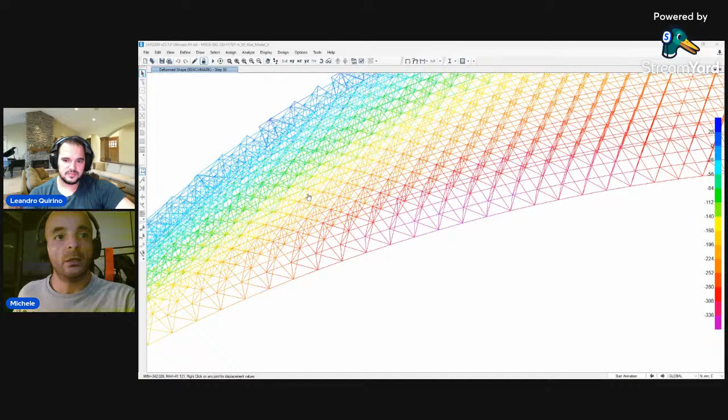No, Leandro? I can only see the trusses. Can you see this one? The two red lines. Can you see the two red lines? No, the only red lines that I can see are the trusses. Which trusses are you talking about? Yeah, those ones you are showing now, if you go to the right, up, yeah, those trusses. Which trusses? Well, I can see an image of many trusses together, and then on the right, probably the tensions are bigger. If you go to the left, they become green, light blue, and blue.

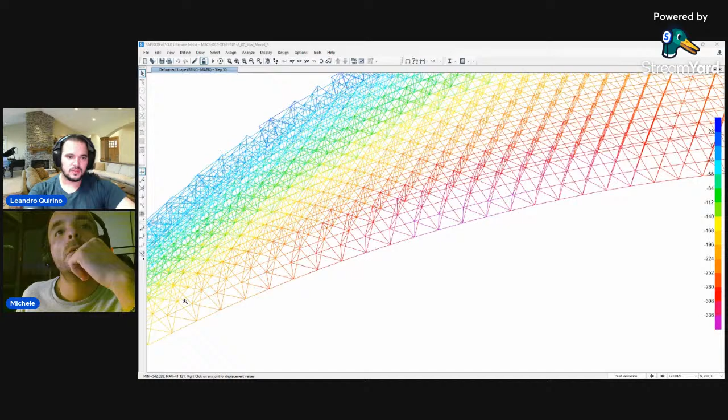Are we looking at the same thing? I don't think so. I'll send you a photo of what I am looking at. No, no, no, not this. It's not this. Hold on. Let me stop sharing this thing. Present again. It was not that one. Share screen. This one here. Can you see that? Oh, yes, I can.

Here we go. So this one is the New Safe Confinement in Chernobyl. This one here is the power plant. This one is the cooling basin that they use for cooling the power plant as well. And what I was mentioning, this is the power plant. So this structure has been built far away from the power plant itself, because what was the problem here? A huge amount of radiation, so nobody can work here for more than 2 or 3 minutes. So what they had to do is build the full structure outside the range of the radiation, and then skid it to slide the structure all the way on top of this structure.

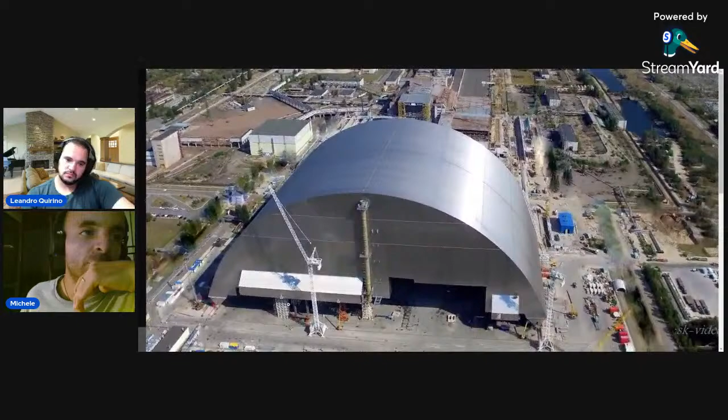So this one was pretty much the New Safe Confinement. When I was on site, one of my tasks, besides all the temporary works engineering that I had to do, I completely redesigned this portion of the structure itself, this cantilever here, and the support for the vent stack. This was the project here.

Regarding the Matagarup Bridge in Perth. Can you see the bridge? I can. This one is the bridge in Perth. Now, on this, I didn't design the bridge itself. I was not involved in the design of the bridge itself. I was involved in the design of the short span on the side, and in all the temporary engineering. So all the methodology in which these two arches have been put together, assembled on site, transported with barges into position, and then lifted up. And this one was in Perth.

Okay, I have a question in regards to the difficulties that you faced when you were doing this project. Difficulties. Well, okay. So imagine that you are pretty much a fresh engineer in a completely new environment, working with a client that has a very strict schedule, something that has to be done quickly. So everything has to be completed in, you know, hours. The pressure is very, very high.

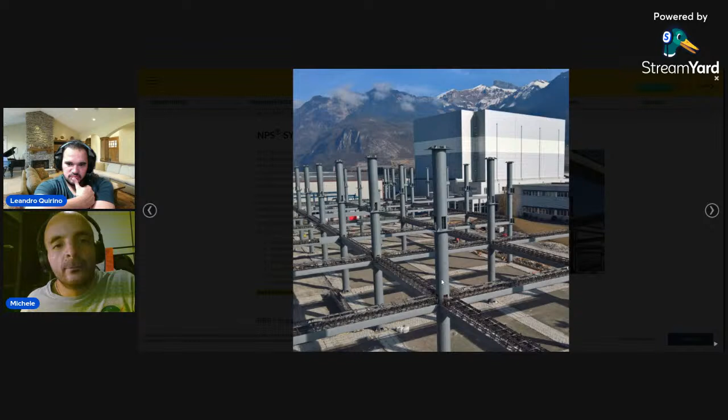This one would be a little bit tricky. Tecnostrutture, because this one was a company that has this system. I'll show you. So what they do here, they have this particular system. They design and they construct this system. This one is a steel tube that will be filled with concrete. So there is a reinforcement inside, a steel tube outside, and on site it will be erected as a normal steel column, and then we will pour with concrete.

And as you can see here, there are also the beams, the same thing. So you have a lower part of the beam that is in steel plate, that is used to be the formwork for the concrete itself. Then you have the reinforcement inside, and here you will pour all the concrete in order to solidarize the steel beams with the columns, and everything will work as a composite structure. How wide are these beams? Because they look really big.

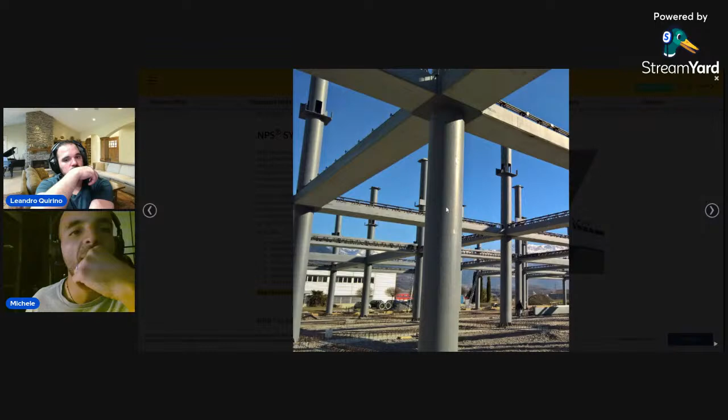This one can be 1.5 meters. Yes, those are huge beams. Some of them are smaller, but some of them are really huge. So this is the system that they developed, and I was on site for them to build. Let me see if I find it. Hotel, New Delhi, Tecnostrutture. Yes, okay.

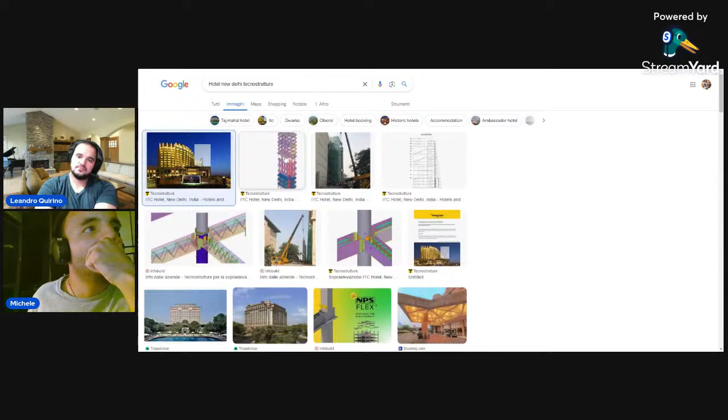Now the hotel is this hotel here. Can you still see the screen? Yeah, I can. So this hotel here. From this side you cannot see, but on the other side behind here, they constructed a full new part of the building, and they had to build this over this wing of the building. So all the things that were above this level had to be supported by this system, and they needed some seismic isolators to avoid a big impact on the foundation.

So what I was involved in was the level in which they created this transfer floor, in which they put some isolators, and I was involved in following the construction for this portion. Yeah, this is the building. Let's see if I can find the portion of the building that they built afterwards. Maybe here. Let's see.

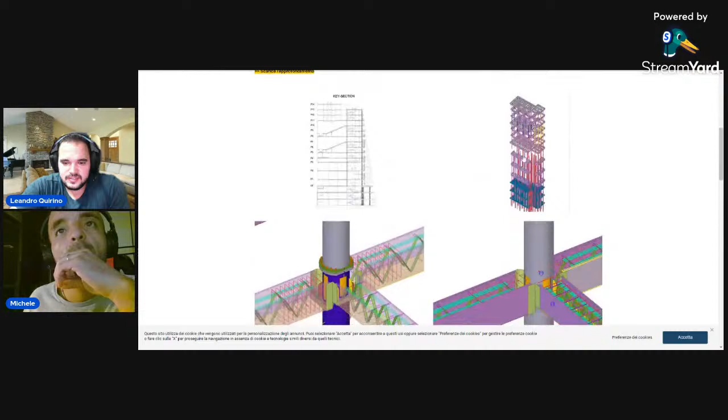Yeah, here we go. This one. Can you see here? Well, I can see one, hold on. Let me see, which is pretty much the one you were showing. Oh, yeah, okay, I can see that. Can you see the model here? I can. The violet model?

Yeah. So this one was the structure that I was talking about. So they built this part, they reinforced this part. Then here they had a big transfer floor, and from there they built all these things up. Okay. So that one was a pretty interesting job as well. You see here. Here we go. This was the construction.

Zero security, zero safety. You were the construction manager? I was the engineer on site. I was not a construction manager. So there they don't have a safety guy. Now here you can see the net around, but they put the net around only to take this picture. The net was put only and only for taking the picture. Really? Yes. Interesting. Yeah, very interesting.

So yeah, this one was the other project in New Delhi. Then after that, I moved to Australia, and there started my adventure in Australia. We are talking about Perth, 2019. Which was Perth, the bridge you showed us? No, that one was 2017. Then I went to United States, New Delhi, and then I came back to Australia, to Sydney. And from there, I never left Sydney.

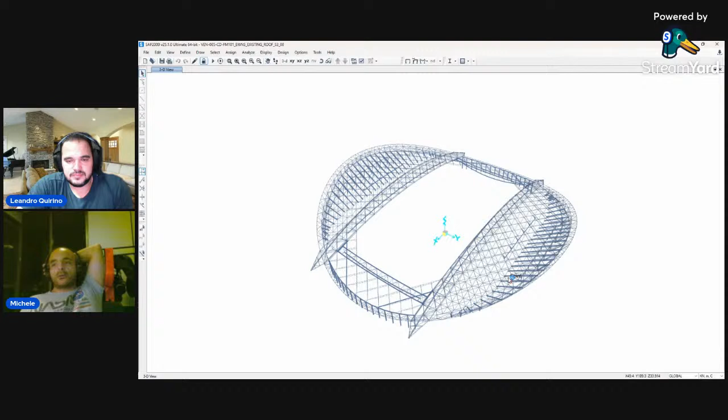So this one is the SAP model of the roof of the stadium that is called right now Accor Stadium, in the Olympic Park. This is the existing roof. So the east and west portion of the roof with a main arch, and the north and south portions of the roof that are two temporary roofs. When I arrived here the first time, I worked on this stadium. I was involved in the roof, but at that time we were developing a fully new project of the stadium itself. And I was the coordinator for the steel part, for all the roof stuff.

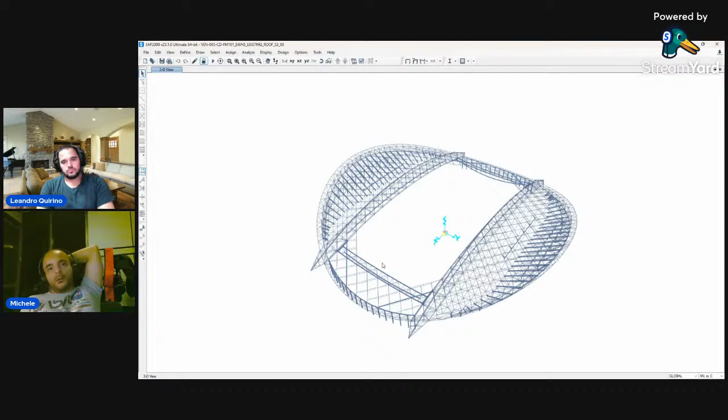At this stage, we are doing this in parallel. We are developing a new proposal for the new roof, but we are proposing also to maintain the existing roof and to strengthen it so that the existing roof can be maintained safely for another 50 years. So this is the type of work that I started with. Of course, in 4 years that I'm here, not all the projects are on this level, because this one is a big project. Not all of them are big projects like this.

But since I started to work here, I worked on four stadia, four stations. So you have been only doing stadiums? No, I've been doing stadia, I've been doing a cable stayed bridge. We designed a cable stayed bridge. We designed a via ferrata. Do you know what via ferrata is? No, I don't.

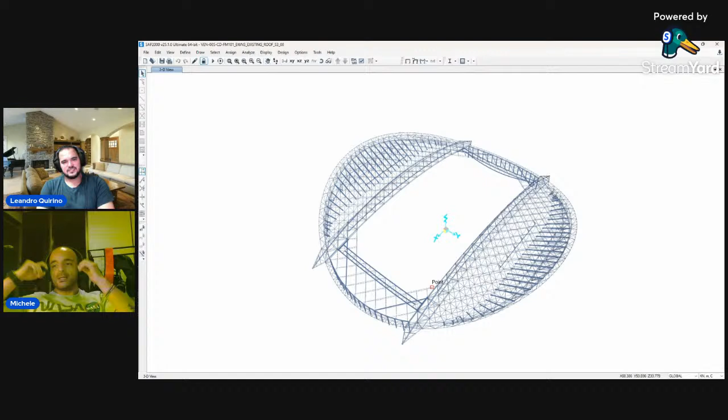Imagine a path on a cliff in which you have to climb, anchored to a rope or to stairs. We designed all the anchors in this structure, and now they are building the thing in Queensland, not so far from Brisbane. So we designed that, and then related small stuff. Sorry, I don't know what that is. What is this? Is it a climbing thing? Yeah, it's a climbing thing. Imagine that you have a series of obstacles like the one here.

Let me share again. Share screen. Imagine that you have a series of obstacles like this, for example, a rope like this, all these things on a cliff. You have these kind of things, no? And we designed a full park of these things in Queensland. Imagine something like that. Via ferrata. The project is being built now, but this is the layout of the project. Let's see. Nice.

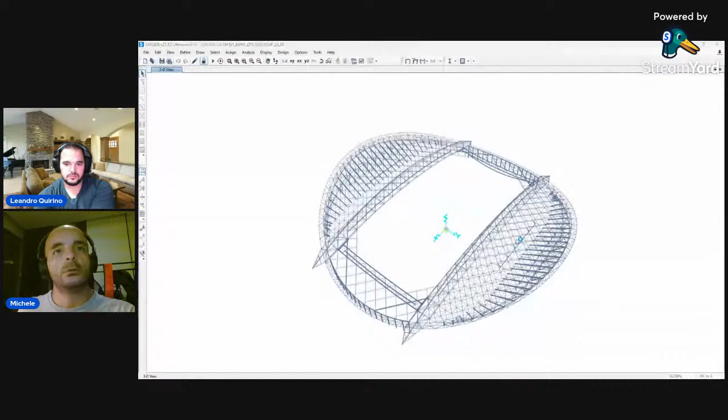So if you want, we can dive straight into a small bridge, a steel truss bridge, and let's go see what's the process. Okay, a bridge made out of trusses. A bridge made out of trusses. So first of all, let me share the screen. Window. Here we go. File. New model. Not save. All right.

Do you want me to go through all the steps, all the choices that I'm making on this, or do you prefer to go more high level on the geometry itself, on the modeling itself, and then focus a little bit more on the design? How do you want to approach this? I will leave it to you as an expert. Just bring whatever you think is valuable for us.

Well, you know what they usually say. If you know how to do something, don't give your client everything, so that he will call you again, right? Right. So the point is, I will give you just a flavor of what it could be, and we will organize another podcast to go more in detail. What do you think? No, that's a good point.

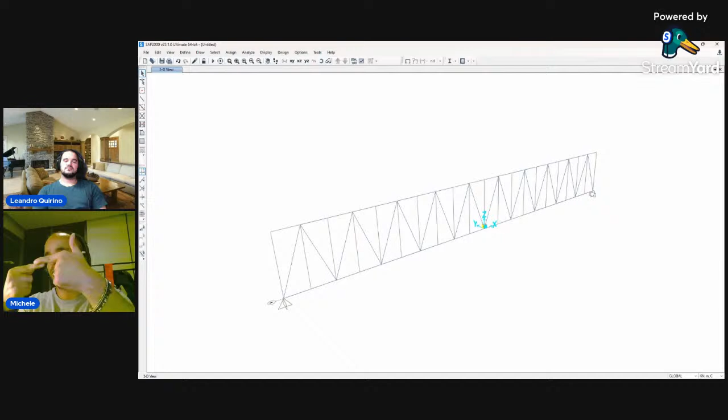We divide the bending moment by the height of the truss, and we see what's the tension force and the compression force that goes in the two chords. If this tension and compression force leads to a steel section that is reasonable, we are good and we can proceed with the detailed design. Or the other option is that this force leads to a section that is too big. So what we are going to do, we just increase a little bit the height of the bridge. Following? Yeah. So for the moment, this one is the first step. We'll see.

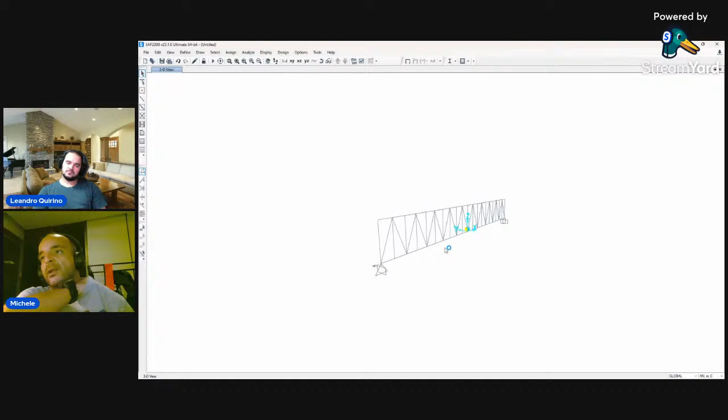Okay, so we take this, we replicate in Y, and we make, I don't know, a 10-meter wide bridge.

And we replicate once. Okay. Then what we are gonna do is, so this one represents the main structural element, the main supporting element of our bridge. Okay, so those are the primary structures. Then we will connect all the transversal members, the secondary, and we replicate these as well from here to here. We say 3 meters roughly.

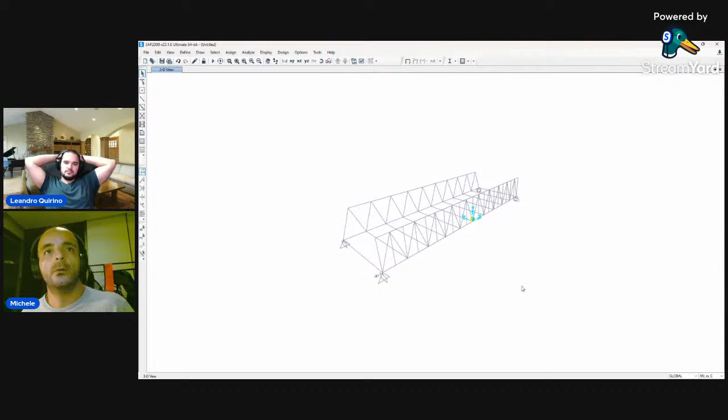Okay, and we have 1, 2, 3, 4, 5, 6, 7, 8, 9, and 10. And apply. We replicate like this. And the same thing here. We put this beam and we replicate this.

Replicate from here. So you're pretty much designing the floor and the roof. Now we are not designing anything yet. Now we are just putting things together. Okay. So this one should be 8. All right. So this is pretty much the shape of our bridge.

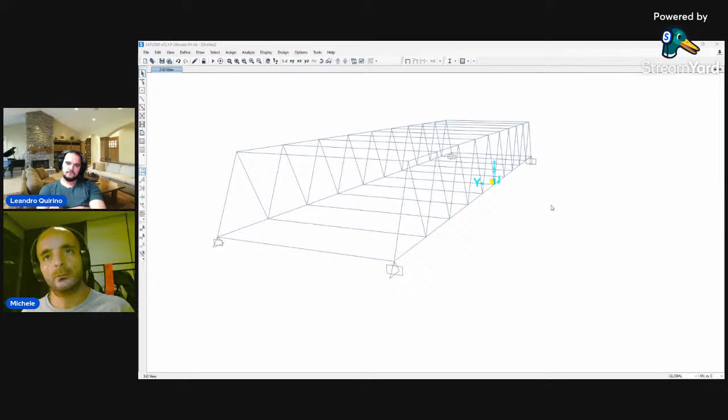If we remove the grid, we can see that in 3D. So now these are pretty much the sections, the default section that they put.

When we design a bridge, of course, there are few aspects that are peculiar to this structure. Of course, we have to make sure that if a certain number of people in the static condition, it means just people standing on the bridge, are all there, and the bridge is full of people, the bridge has to resist from the strength point of view.

The other thing, and this is general for every type of structure: not only we have to make sure that the structure has the real capacity to sustain the load, but we have to make sure that under a specific load, the structure doesn't deform too much, because the deformation can cause other issues. For a building, a huge deformation can cause cracks in the partition walls, for example, or in the ceilings. For a bridge, a big deflection can cause a problem for the drainage, for the lights that are installed on the bridge, these kind of things.

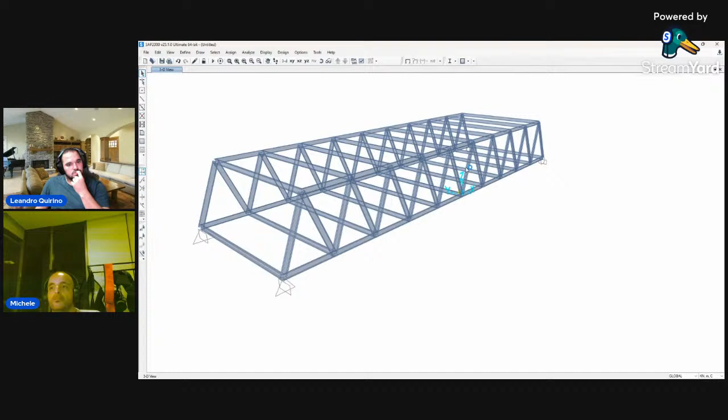And this is the reason why, I don't know if you know this, this is the reason why the army, the military, stop marching when they cross a bridge, because they want to avoid catastrophic failure under resonance. So a platoon stops walking in sync because of this problem.

So yes, this is a very, very important aspect to take into account in the design of bridges, in long span structures, and in general in every structure. Of course, some structures are more vulnerable to this type of thing, like very slender structures like these, while a huge concrete structure is less prone to have problems under that type of load, even though it's always important to have a look at this.

This is to say that we don't have to stop at just checking the capacity of the beam and say, okay, our job is done. No, our job is done when we are able to make sure that all the aspects of the design are covered, and the design itself is satisfactory in terms of constructability.

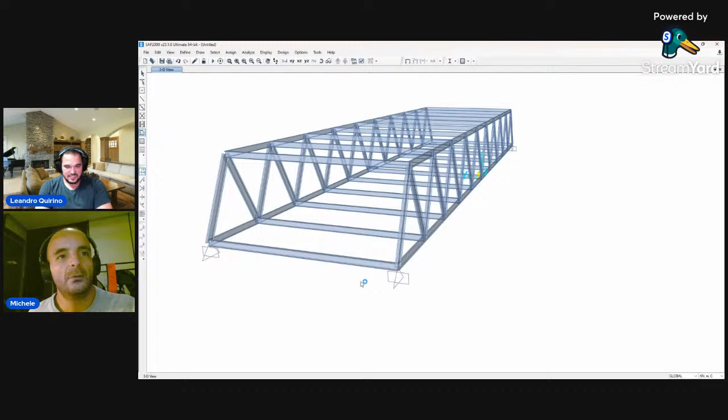So, now, regarding the loads themselves, for a structure like that, I will go the other step. If you want, we can continue a little bit, but from now on it will be pretty much the boring part, because we have to apply some loads and see the limits. Well, first of all, we have to make sure that this thing is standard.

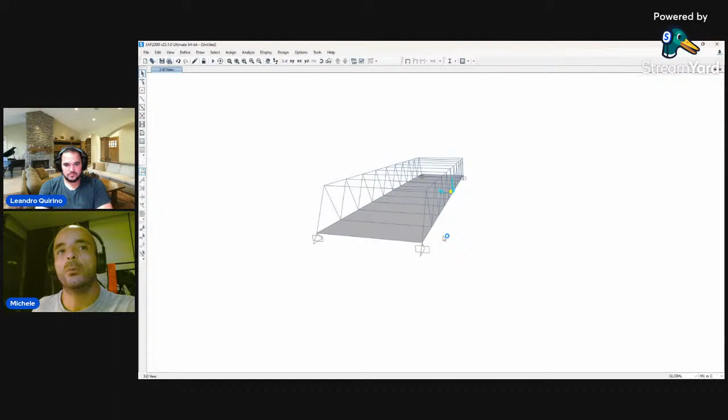in general, for this type of structure, the deck, that is the horizontal part of the bridge, will work as a composite between steel and concrete, right? So we should have the steel beams that are running through, and then on top of those steel beams, there will be a slab which will act in conjunction with the steel beam. So altogether, they form the membrane that we are gonna do, right? So let's assume that we are gonna do exactly this thing.

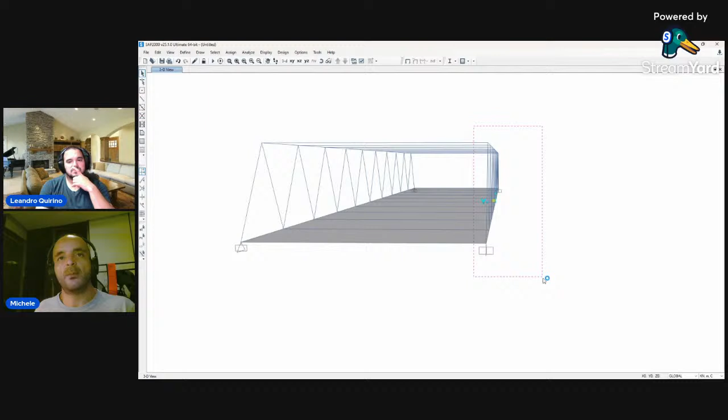Now, the other thing that we have to do, we said that this one is 10 meters wide. So we have to add some intermediate beams on this. This is our primary structure, okay? The two trusses on the side. Then we have secondary structure, the beams that are transversal. And then we will have a tertiary order of beam that will go from here to here, that are required only to reduce the span of the slab itself.

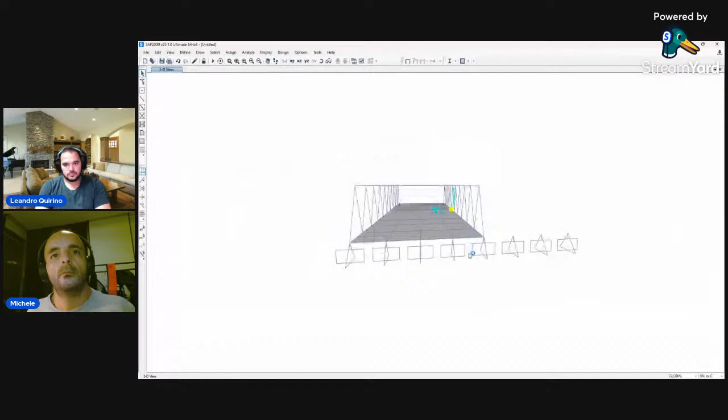Let's do that. Edit, replicate, pick the point from here to here. Let's replicate from here to here, minus 10 divided by 4. All right. So now what we have to do is let's apply some load here. We will define our first load cases.

So dead load. The dead load is automatically calculated by the program, but there are some elements that the program cannot take into account. For example, this one is mainly in steel. When we are talking about steel structure, we have to take into account the weight of the connections, which can be pretty consistent. So we have to increase a little bit the self weight of the structure itself to take into account the bolts, the welds, the other plates used for stiffening, these kind of things. So for a structure like that, let's put 1.2. So it means that 20% of the weight of the structure is for the connection.

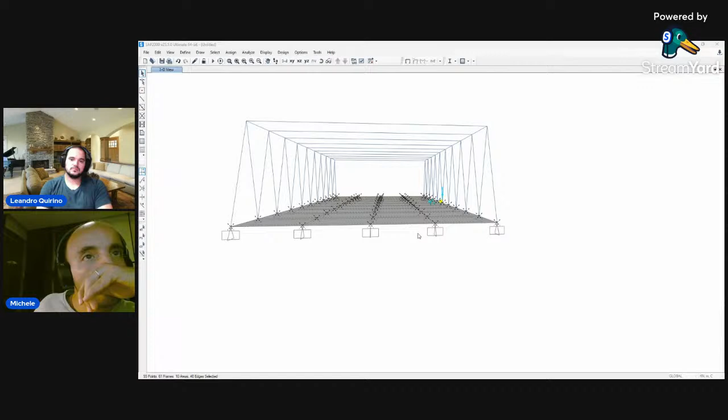Okay. Then we have SDL, and then we have 0 here. We add it as a dead load for the combination, and then we have live load. Here is live. Add. On this, we should calculate the wind. We should calculate the earthquake, but let's put some wind, just to see the application of wind as well. Okay. This is wind, and then we can put EX

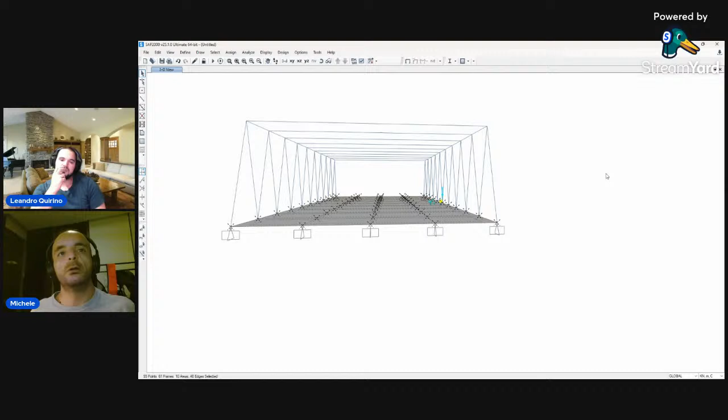other. I can't see anything you are doing. I don't know why these things do not show up. Let me see if I share the screen again. Hold on. No, it doesn't show the additional windows. Yeah, I can only see the truss there. The main window. Okay. Only the main window. It's a shame because you cannot see all the definitions of these things. All right. Let me quickly assign these things, and then we will go to the results directly, because unfortunately you cannot see what I'm doing. Yeah, you don't really see what I'm doing. Maybe we can organize this kind of activity for a future time. That's okay. Because it's a shame. I can go ahead for another hour, but you can't see what I'm doing.

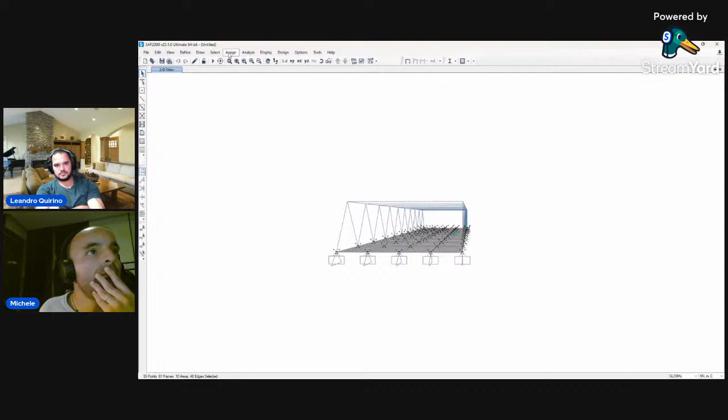It's okay. Let's go for the results and see how the structure is going to behave. Let me add some load and let's see. Assign. Area section. Modify. It's a shame that you can't see, because there is not much point in doing this. Define, assign. Now I'm trying to assign some quick loads to see what's going on. So I'm assuming 1.5 kPa for the superimposed load, and of course 5 kilonewton per square meter for the live load.

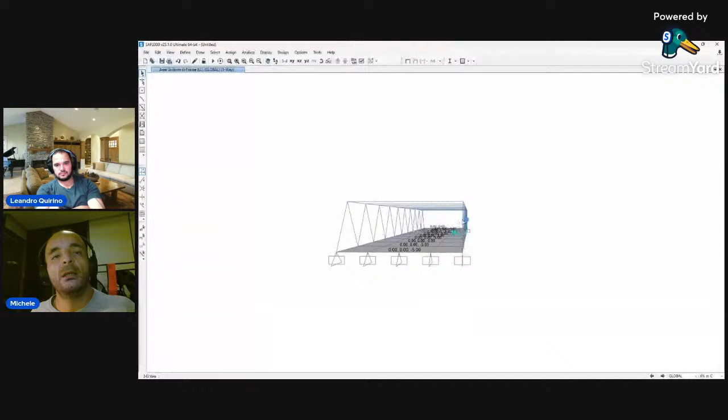And here we will assign some wind: frame loads, distributed wind in the y direction. Let's go to a wind area. Let's put 7 kilonewton a meter of wind. It's a lot, but let's put it like that. Then the other thing that I wanted to do is let's define the load combinations.

So for designing the load combination, we have to decide which code we want to use. Let's use the Australian code. Let's consider the deflection as well. Yes. And then we go select design combo. Automatically generate the combo, define, and automatic design combo, steel frame, select load cases.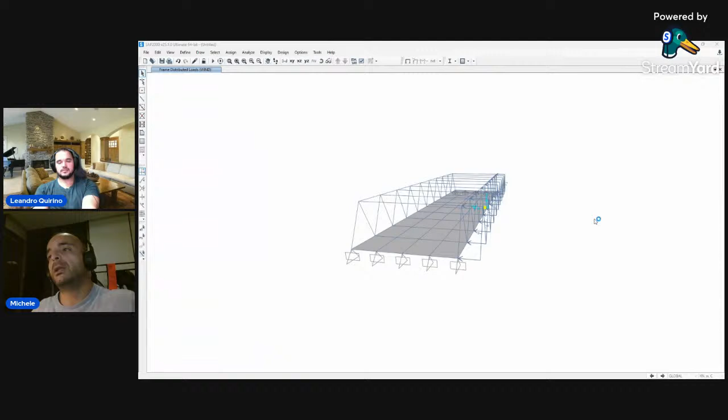Can you make this window smaller so we can see whether I will be able to see the other windows? No, but it's not another window. It's a pop-up window that is coming from the program. It's not two separate windows. Oh, I'm right clicking on the program itself. Right, right. I got it, yeah. I get you. So that's the main problem.

I'm just quickly checking the combinations to see if everything is appropriate. It seems to be modified. Yes. Yep. Okay. Now what we have to do is design, select design combo. Yep, this is correct. Okay. Let me save this thing.

New folder. And I hope that you are not getting too much bored. No, it was just going to be more interesting to see the inputs that you are doing. I know, I absolutely know.

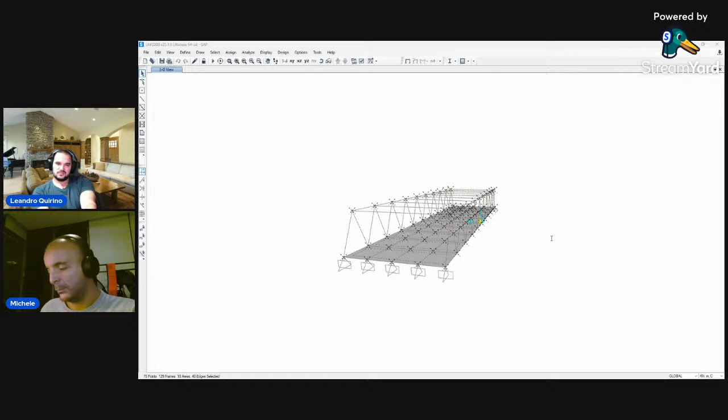0.5. Apply. Area edge release. So you pretty much applied the loads, you did run the structure? No, I didn't run. I just defined the loads, defined the load combinations, and applied the loads. Now what I'm doing is meshing the structure so that when I run the analysis, it runs properly. The results are more accurate. You know? Yeah, I do.

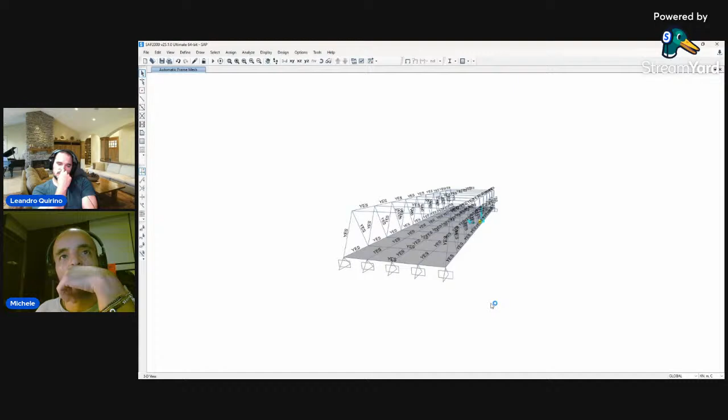Automatic area mesh. Now SAP allows you to automatically define the size of the mesh that you want to apply. And I'm doing this automatically now. I'm trying to apply the same discretization for the members and for the mesh, so that when this runs, everything is pretty much connected together.

Now, the other thing that I have to do: if you see here, when I select this element, you see that it's spanning between this and this. Instead of spanning between this and this, it has to span between here and here, between here and here, between here and here. You know? Yeah. So I have to take this and subdivide. Define, edit lines, edit areas, divide.

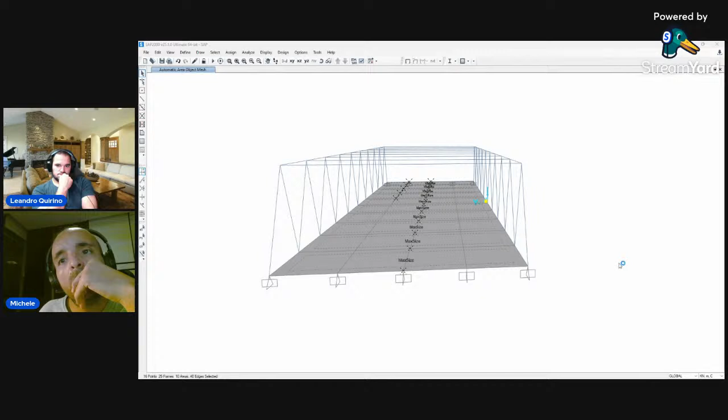Okay, so you see now. Now the other thing that I want to make sure for the structure that we are designing: we wish that the loads are going from this member to this member, from this member to this member. Then those members here will transfer the load to this member and this member, right? And those members here will transfer the load to this member and to this one here, right?

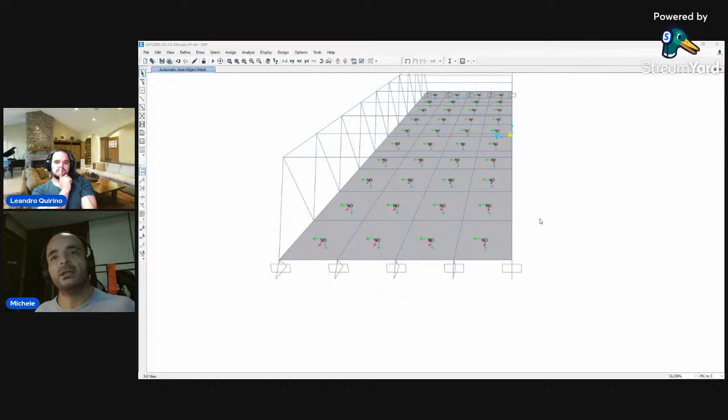So when we apply the load, we want to make sure that the main direction of the loads is this, then this, and then this. So for doing this, I have to check how these elements are oriented. Now you see the red arrow. The red arrow is the direction in which the load is applied, because I applied the load in such a way that it's gonna put the load on that and redistribute on the two edges, right? Now, since this one is oriented with the red arrow this way, the load will go from here to here.

I'll show you an example. Display load pattern, the area uniform to frame resultant, apply. In that there is nothing, so let's go with this. So you see. Yes, I do. So what I'm gonna do right now is select all of these and change the orientation of those elements.

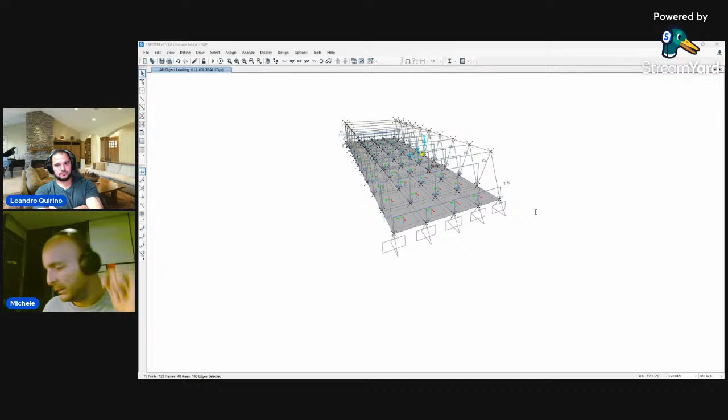Define, assign area local axis, and we rotate these things by 90 degrees. We apply this, and then when we go and show this again, we've changed the orientation of the loads.

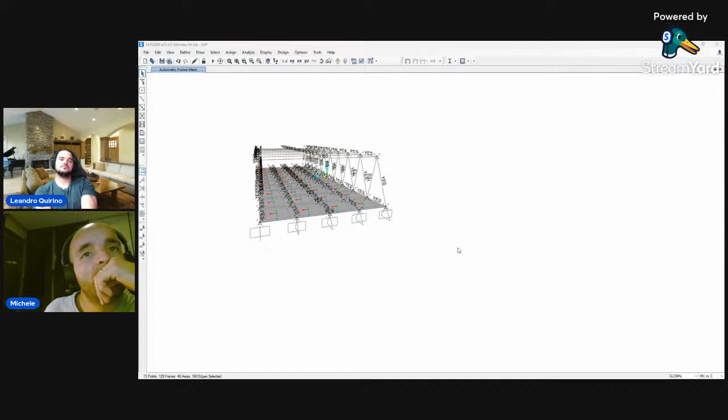All right. Okay, so you just... So they are in what, the biggest span now? Yeah, they're just going the other way. Yeah. So now the other thing that I have to do is again make sure that everything is meshed correctly. Assign area automatic mesh 0.5, 0.5. Okay.

Now the other thing that I have to make sure of: we said before that the beams should act in composite action with the slab itself, right? Yeah, right. So for doing this, I'll show you something. Now, can you see here how the beam is located with respect to the slab? The beam and the slab are in the same plane. You see, the beam is sticking out from the slab. This is not the situation that we want. What do you want? We want this.

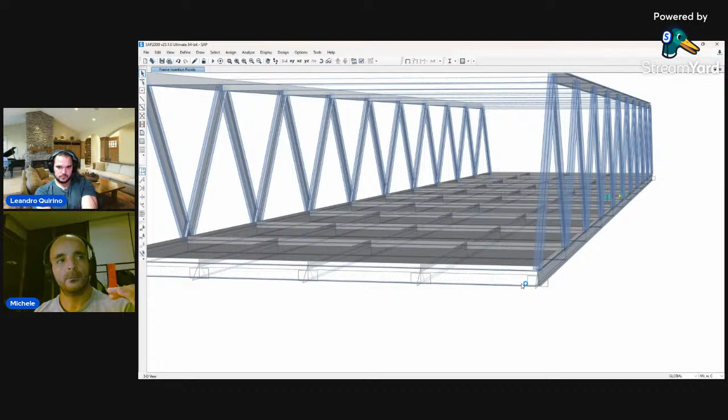Assign frame insertion point. Top center, apply. You see how the beams changed? They shifted down. Now, this is not enough because the slab is still halfway into the beam. So what we have to do is raise up the slab itself.

Sorry, why do we need to raise up the slab? Because if they are in the same plane, they don't act compositely. Each element acts on its own. While if you take the beam and put the slab on top, when the beam tends to bend this way, the slab will also give a contribution. So the resistance of the beam and the slab together gives you the real resistance of the structure. Okay. So we have to raise the slab as well.

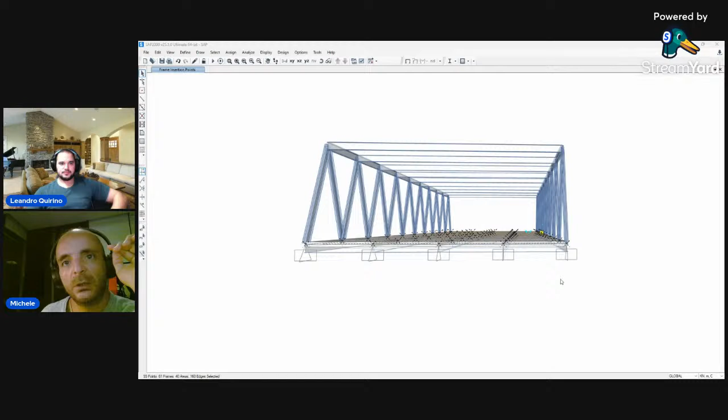Area. All right. Now the slab thickness that I use is 180 millimeters. So we have to raise it up by half of that, which means 90 millimeters up at each point. Apply. I put 90 meters, because I usually work in millimeters. Yeah, I can't see the slab anywhere. Yeah, I know, because I put 90 meters up. Okay. Now I have to modify. Here we go. Okay. Now everything should work properly.

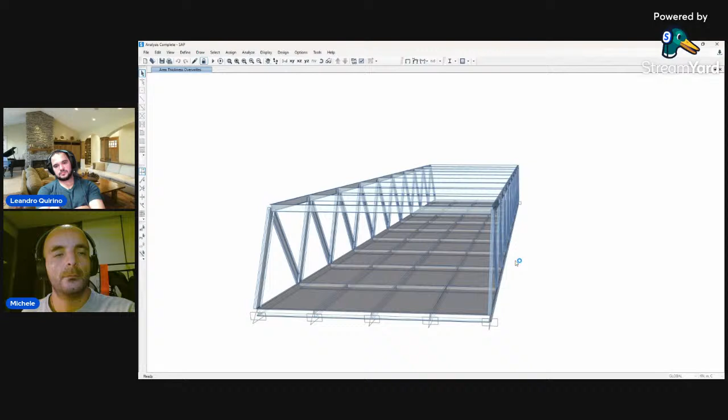Save and run. Now here we have to go pretty much into detail of what's going on, but you see here the structure itself is deflecting 105 millimeters under the self weight. Can you see that? Okay, yeah. 105 millimeters means that if we take 30 divided by 105... so 30-meter length, right? Right. 30 meters was the total length. The deflection under self weight is 105 millimeters, so the deflection is L over 285.

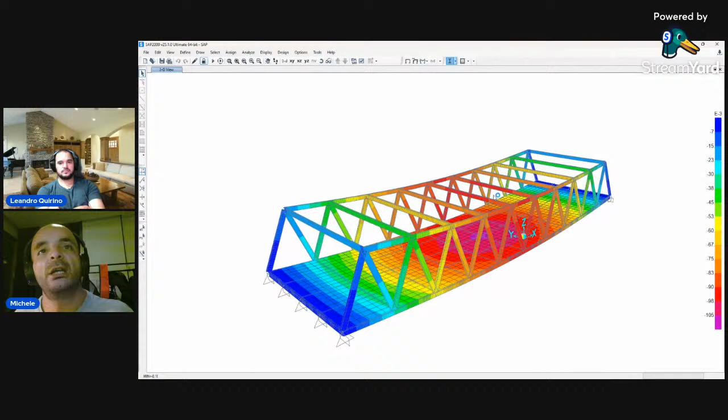Which is not bad. Sorry, how good is that? How much is the limit? The limit depends: 250, 300, it depends. Probably we have to stiffen this a little bit. But what we are going to do is run the check of the steel members. Now, all the members are the default ones; I didn't change anything yet. What I want is to have a feeling for how the structure will behave.

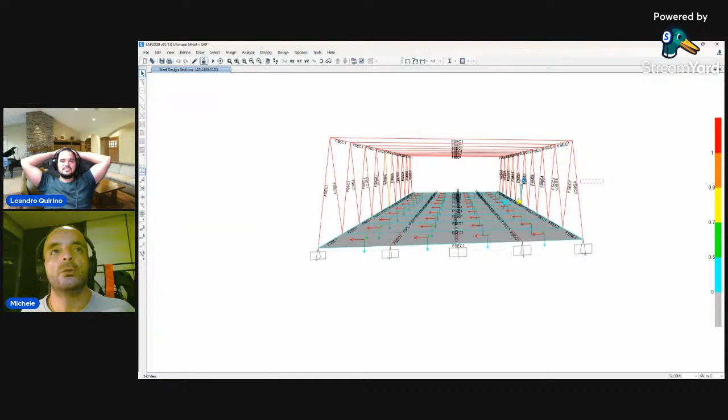Now, what we can see here is that the beams that are composite with the slab are working okay. All the other beams are failing. So we have to do a proper design of these things; we need to increase the section. We could do this in several ways. Of course, we could have done a pre-design and put the section directly in the program. Another thing we can do is assign automatically. We can tell the program, find the optimal section that allows me to pass all the checks.

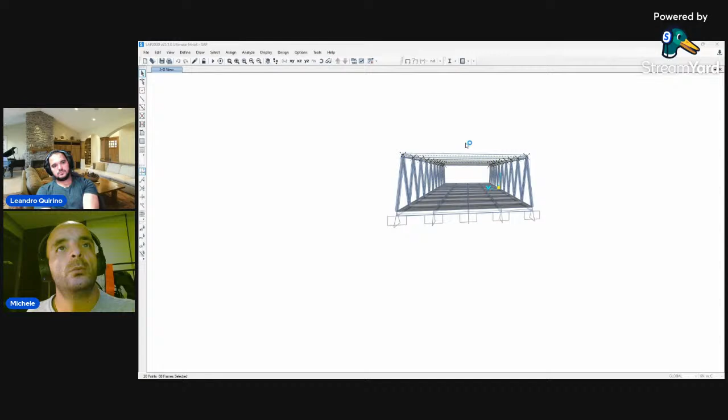So what I'm going to do is define frame section, new section. I have to import; we want to use open sections. So I-beams, Australia, New Zealand. We are going to select all of them. For the moment, we don't care about the material. Add the new property, then other, then section designer. Design type, general steel section. Import the new property here. Section designer.

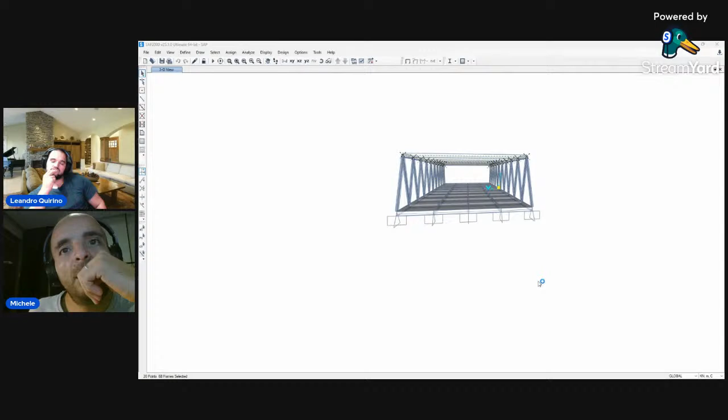Seriously. Add the new property, add auto list. We are going to assign all of these. Okay. Define frame section. What did I do? Okay. Assign frame section. Now this will take a bit, but you can see that now everything has changed. What I did is define a list of sections, and the program is going to pick from this list in order to achieve the full design. Okay.

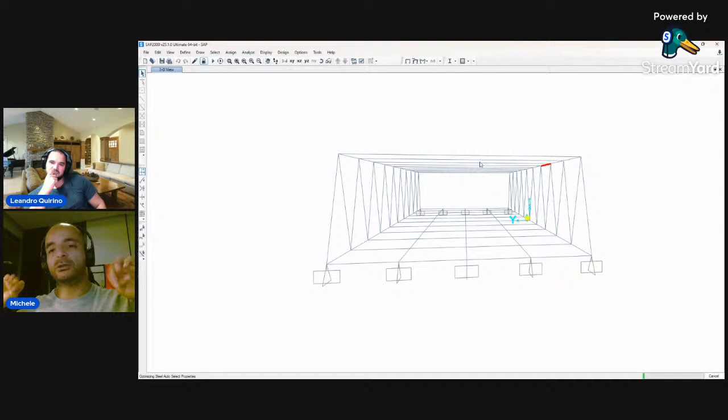Let's remove the extruded part, maybe it will work a little bit better. Let's remove the slab, not in view. And let's design this thing. It will probably take a bit of time, but maybe not that much. So now the program is just changing the sections.

What is done usually is that you tell the program, this is the list of your sections. Automatically assign one of them and start with that. Do the analysis and tell me if this section fails or not. If the section fails, change it. Go with an additional section. Now the process is an iterative process. Why? Because if you change the section, you change the self weight of the structure, so the load changes. So you have to repeat this.

We have to repeat these things several times. But for the sake of this, we will try only one, and we will go with this just to show you all the steps. We are pretty much almost done. So okay.

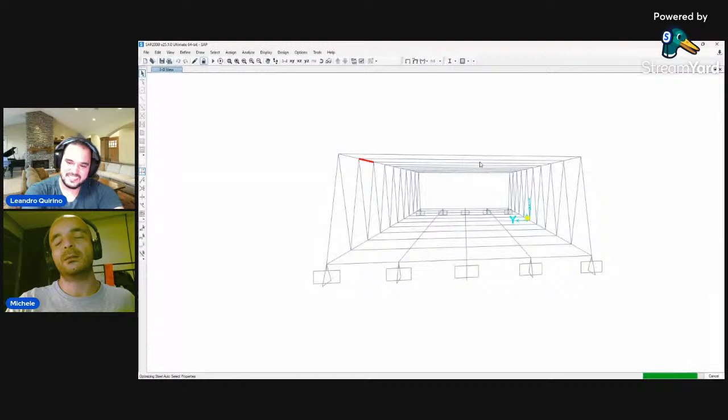Now the program is pretty much doing what we used to do in uni, analyze every single section and then change it. The program is doing what I should have done since the beginning. Now, okay, here I have done a very broad thing. I put all the sections. Now, it's not something that you usually do. You choose a certain number of sections, and then you go with them.

You see, here we go. And this one is the design now. Everything is satisfied. Now, this one, I didn't include this for the moment, but let's forget. As you can see, everything seems to be fine. Now, let's see this section, what section he decided to have. You cannot see from there, but okay, the section that he decided to assign since the beginning was a 700 WB.

The design section that he thinks is required for this type of analysis is 273 HP, another type of section. So now, to make the process run properly, I have to delete the result, rerun the analysis. If the previous sections are equal to the next sections, the process is complete. Otherwise, I have to rerun this process again until the sections at the previous stage and the sections at the actual stage are the same. And the design is done.

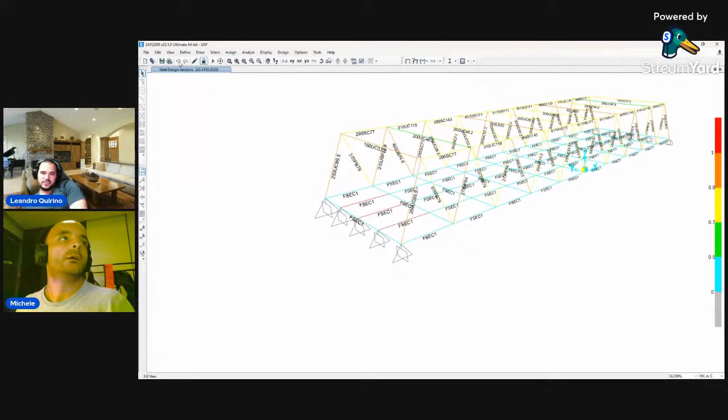All right. So yeah, and this is the design of the project. Now, I gave you a bit of an insight on what should be done, and this is how it should be done. Now, the other thing that you should check, and it's very important to check, is the mode shape of the structure that tells you how this thing is acting dynamically. So here, just to show you one thing.

Now, you see this number. Which number? It's 3 millimeters, is it? No, this one is 3 hertz. 3 hertz. Yes. Okay, so the first mode shape of the structure has a frequency of 3 hertz.

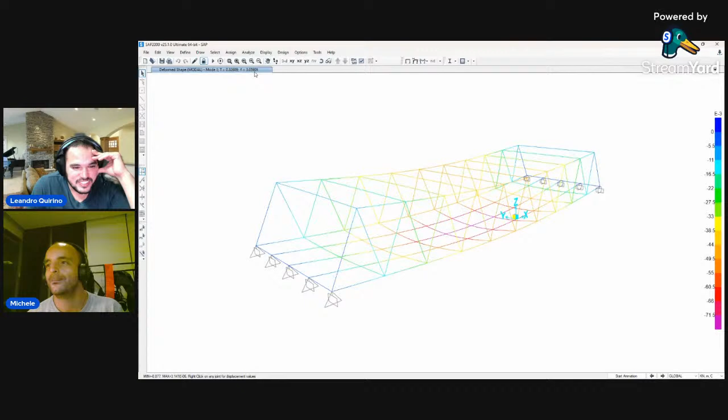It means that if you are running on this bridge at 3 steps per second, you're gonna make this bridge vibrate too much. So this is a shit bridge because nobody can run on it. No, but the design is not complete, of course. This one, as it is right now, is a completely useless bridge, as it is now.

But I want to remind you something. In London, one of the most iconic bridges has the problem that I'm telling you now. The Millennium Bridge in London was opened with this problem, and what they had to do afterwards is install some device that reduces the vibrations after the opening.

After the opening, people were walking, running and so on on that huge bridge. And only after that, they understood that they had to put some additional device to damp those vibrations. So this is a shit bridge, but it's not uncommon at all to have bridges or structures that behave this way in real life.

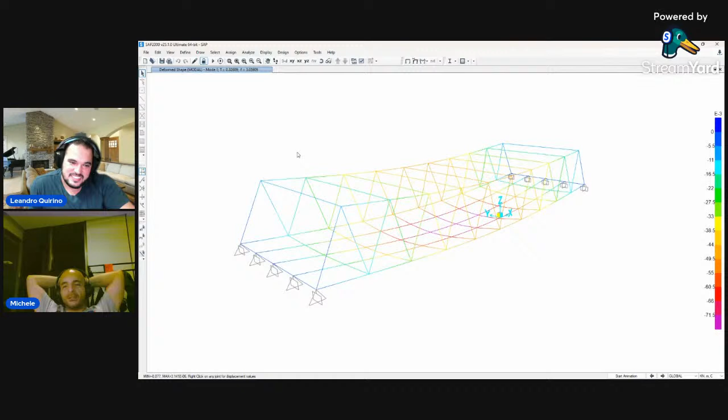You mean bad bridges? So we have many bad bridges. Yes, we have many bad bridges, many bad structures that are good for just one purpose, not for all. Okay, so that's pretty much it. So what's the solution? Should we change the engineers who are designing the bridges?

No, the solution is that we have to put more time, because this thing shows that you cannot make a design of a structure in 10 minutes. There is no way. You have to think about that.

Of course, it's not a pizza. Yeah, the pizza requires 3 minutes. So if you make a pizza in 10 minutes, it means that you are making a shit pizza. If you make a design in 10 minutes, you are making a shit design. Yeah. So simple as that.

Okay, so to fix the mistake. There is no mistake. Here, there is no mistake on this bridge. Yeah, to fix the problem of the frequency. Which frequency should we have? We should go at least above 5 hertz. 5 hertz. How do we get 5 hertz here?

One way could be probably to use a larger section and to reduce a little bit the span, because now I consider 3 meters. Probably if we go with 2.5 between here and here, we remove the problem. We have to make these things a little bit stiffer. Can you change the span to 2.5 now so we can see if we fix the problem?

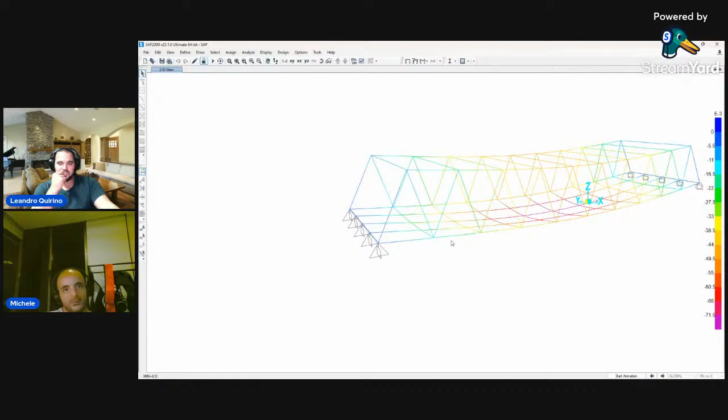No, I cannot. It's not that easy to change. Right now, let's see. It's not simple. Let me think. Because if I reduce to 2.5 or whatever, I have to add another one. Let's see what can be done. Okay. You know what we can do here? I'll show you. Because I didn't change these before. Those things are 10 meters anyway, so a huge span as well.

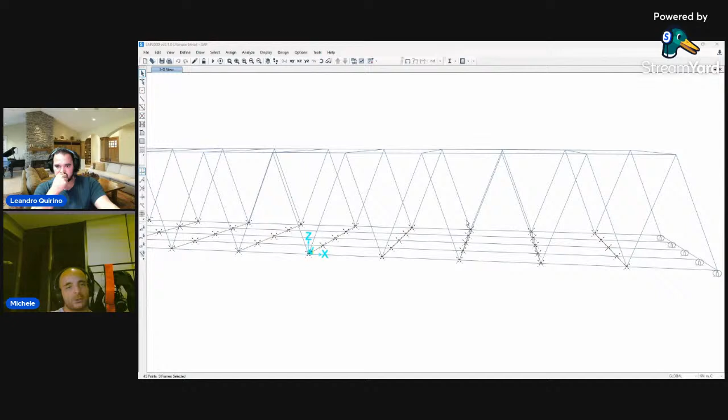What we have to do is we assign a different section for this, because I thought that even the section that I used for this was a huge one, but no, it was not. So if we go with, let's go with 800 WB. Let's see what I put here. You see? Yeah, what did you change? I didn't see anything changing. The section of this beam. Oh, you changed the section.

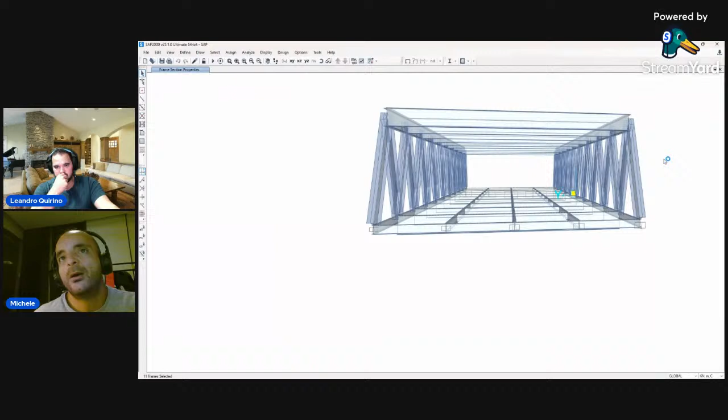Yeah, because when I did all the design, I didn't change this section. I made only those sections here change. So now I change the other one. Let's see. We are almost over. No, we haven't solved the problem with this. So probably we have to make everything a little bit stiffer. Probably we have to make these stiffer as well. You mean the main structure? Yeah, probably the main structure.

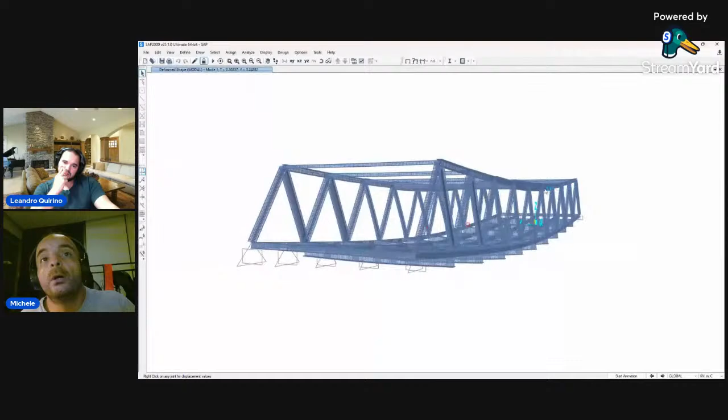So one way could be to have a cable or a strut that goes from here to here that connects the top chord. The other way could be a tube. We could use a tube, but I mean, we have to do something. The other way could be to increase a little bit the height. The height itself could help. Move it 1 meter up.

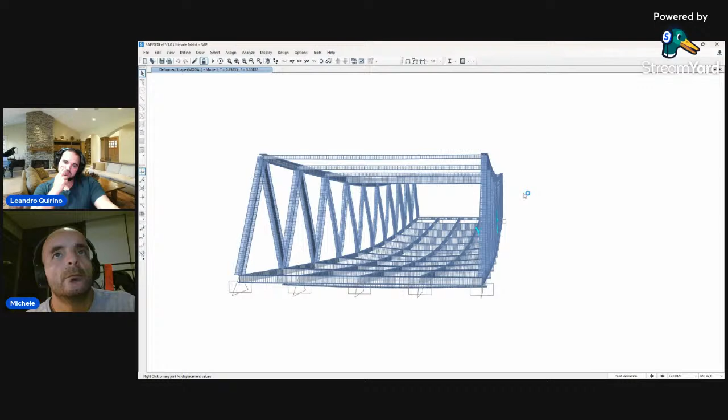Now, of course, all these sections have to change accordingly, but no, it's just too heavy. This is just not the right typology for this type of bridge. It's not the right what, sorry? It's not the right typology. Probably we have to go with a different typology, or we have to make this thing stiffer. Probably changing this element here, this element here, and this element here. Side. 800 WB, for example. Let's apply.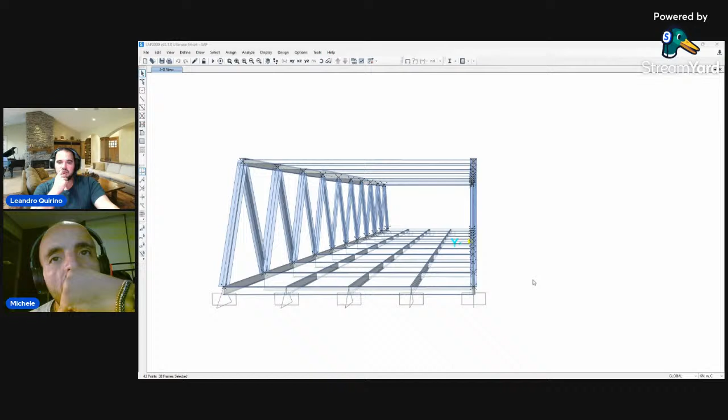No, no, because what is the problem here? And I will show you something. We haven't solved the problem, not even this way. What's the problem here? The problem is that the deflection of this point is not stiff enough here. So we have to make this. That's exactly the thing. Now I put 30 meters. Probably this type of structure is good for 20, 25 meters, something like that. So we can fix it, but we have to go and make modifications.

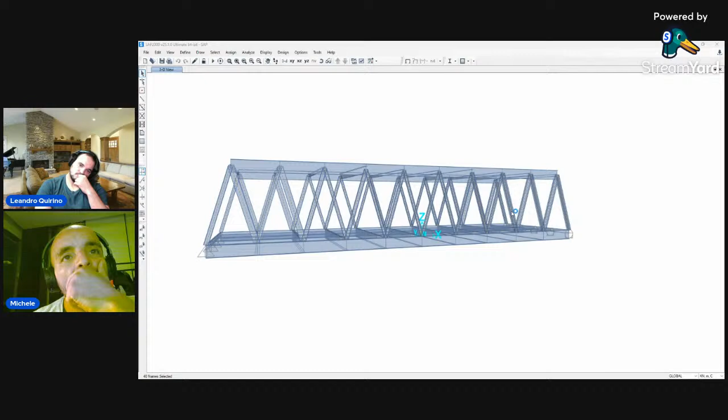Probably if we go with a tube here, maybe something that we can go with. Assign frame sections. Now I'm pretty much throwing numbers. It's not how you solve the problem, right? No, usually you don't solve the problem this way. We have to avoid it. You know what? Not even this. So this one is not the right topology for the bridge. It's just inefficient.

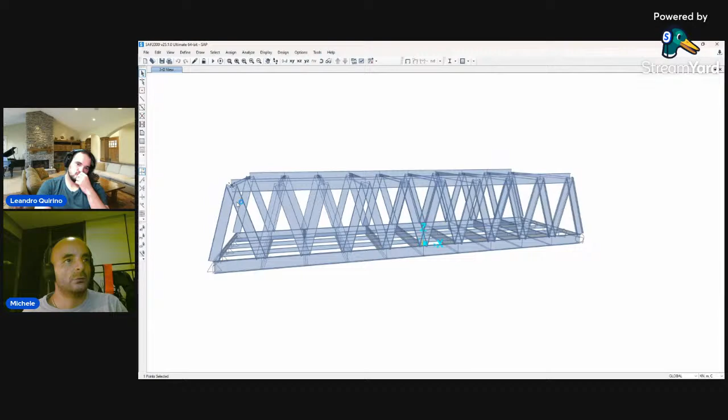Because all of these changes that we have done didn't really change the behavior of the structure. You know what will change the behavior of the structure? I'll show you something. Let's go back to the previous. Well, forget about the previous. Here and here, here and here. Side restraint. You see, now we started to change. Now we are more than 4. What did you do?

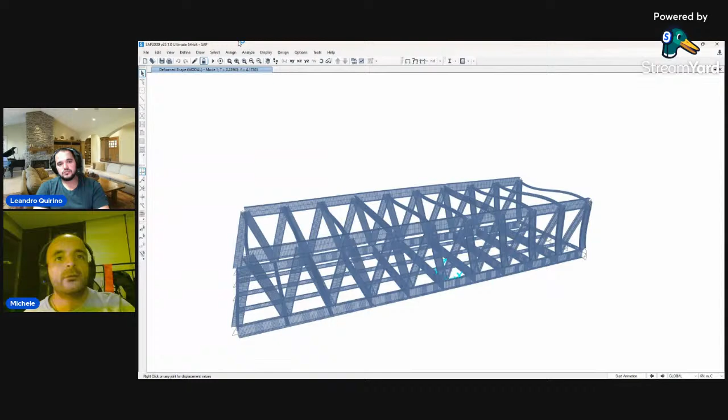I put some restraint here and here. So I imagine that I could put a strut that goes on the ground or goes in a tower or something like that. So now we are at 4.7, 4.1. Now 4.1 is already acceptable. It's not the best, but it's already acceptable. But now do you have to do the same thing in every single point? No, what do you mean in every single point?

Well, because you assumed that you're gonna have some cables. Yeah, I'm assuming that at the beginning and at the end I have either a cable or a strut or something fixed in a tower. If I have a tower on the two sides, I can fix the structure into them. But now I want to show you one other thing. Can you see here the shape has completely changed? Now we are not caring about this shape. We have to care about the shape that gives you vertical deflection, like before. Do you remember that before it was curved this way? Yeah, so that one was the frequency that we are caring about.

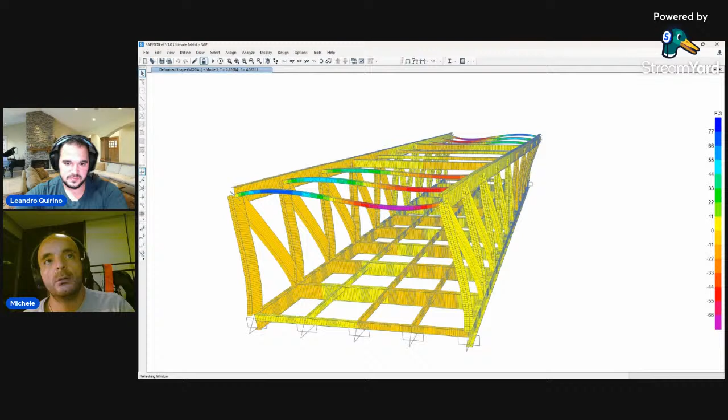Now this one is 4.1, but it's not the frequency that we are looking for. So we have to go. I'll show you something. This one is still not the one because it's moving sideways. This one is still moving sideways, but it has a bit of deflection here in the middle, right? So now what we have to do is not only check the frequency here, but how much structure is contributing to this. Now we are going to a complicated thing, but another thing that we have to check is modal information, and I'll show you quickly this, and then we can conclude.

Now we have to make sure that if we are designing only for seismic action, this is above 85%. This one is 97, so this one is good. Are you following me? This number means that 97% of the total mass of the bridge is contributing to the dynamic behavior of the bridge itself. Then we have to go to the participation ratio, and we have to find here. This one is what I wanted to show you.

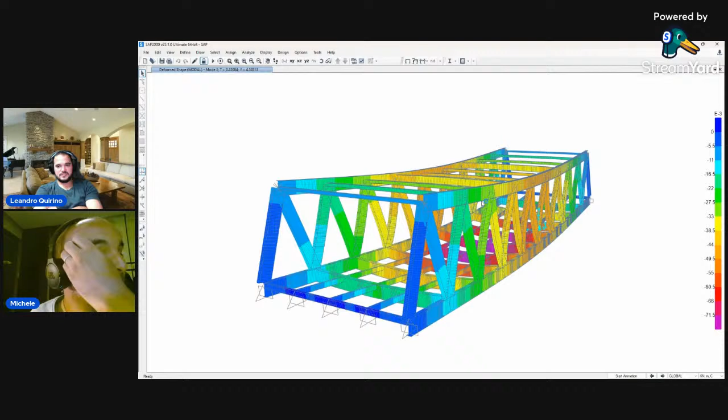Now, the first mode that we have to really care about is this one here, the third, that has a mass of 78% of the full structure. So we have to make sure that this one, the third mode, which is 4.5, is pretty good now. Did you get the point? I think, yeah. This is a complicated topic, but we have to be careful about what we are looking at. It's not always the first number that we see. So even in a simple structure like this, there are a lot of things to take care of. Simple structures have particular problems. Exactly right. And this is pretty much it.

What do you think? Yeah, nice, that's a nice analysis. What would be the next steps? The next step will be to reduce a little bit of the weight of the structure and to make sure that everything works properly. This is pretty much the design that I will consider. Now I will check the weight of the structure and compare it with a standard construction. For example, for a pedestrian structure like that, I'm expecting a weight of, I don't know, 110, 120 kilograms per square meter.

If I'm not at that weight, it means that I have to improve the structure itself. Maybe changing the height, maybe changing the section, changing the typology, doing something else. And then when I have done all of this, I have to go to the architect and say, this is my design. Do you like it? They are going to say no, and I have to start all over again.

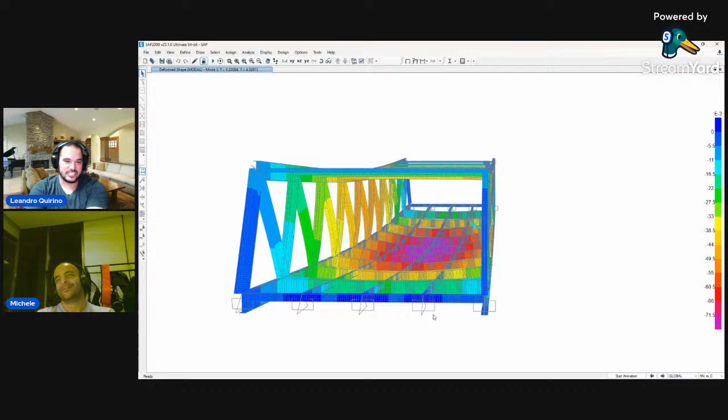So they will never like the first design. That's what you are saying. No, because they usually say, okay, but can we start to avoid all of this? So a design that they would like, for example, would be this. I'll show you a design that they really would like.

I hope that there are no architects in your audience, because otherwise I will start with a lot of enemies, right? I'm pretty sure that we will have some architects here. Architects, don't get, that's not personal, right? No, it's not personal. It is what it is. I just mean something that happens in real life.

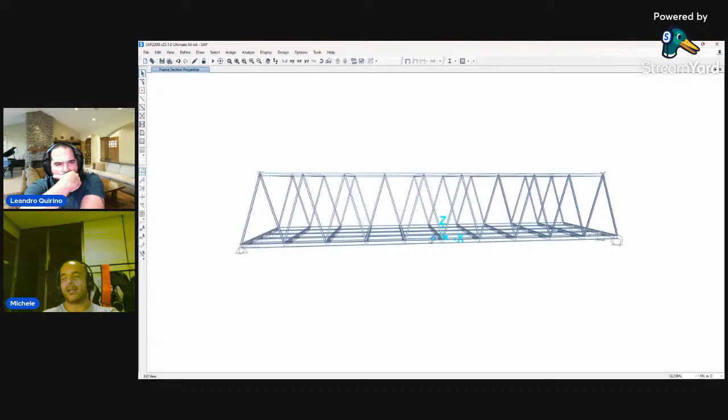And this is a structure that I'm pretty sure they would like. This is a structure that they would like. Really thin. Yeah, really thin. And then they say, okay, this is the architecture that the architects would like. Then, if you go to the construction company, they will say, okay, but can we do this? The construction company will say, okay, can we do this?

Well, in this case, what do you say? You ask if they believe in God, because not even God's gonna be able to save this structure. No, I will say, okay, if you want to install these things on top of the building and nobody is gonna go, yes, of course you can go with this.

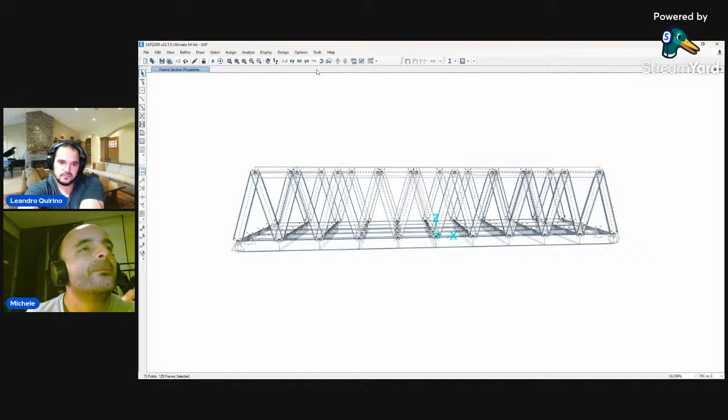And instead, the structure that we like, I'll show you the structure that we like. If I have to design one structure, I will put this. So just to show you the three different views from people. This is the structure that I like. Jesus. That's too much. Yeah, but it's safe. And it is expensive.

Well, I mean, compared to what? Compared to one of the bombs that they're putting? 10.8. Huh? The what? 10.8. Yeah, the frequency.

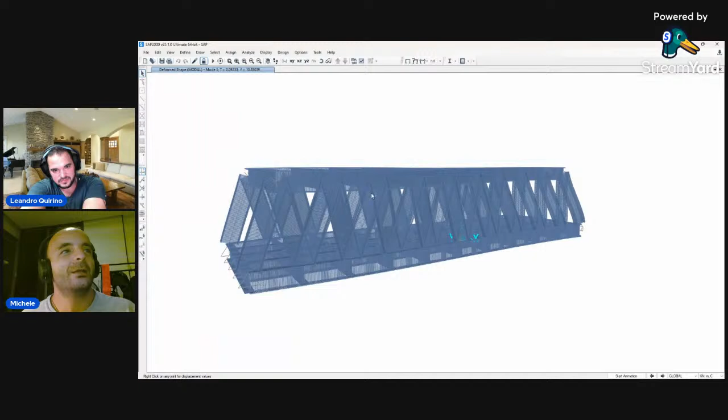So this is a structure that I like. And on this, we can even remove these things. We can remove these things. Put 3 here. We can remove the things that I added before. So the bottom line here is, as a structural engineer, if they give you a design, it's better that you start from something like this and you go backward. Because if you start from something that is more rational, then we will arrive to the structure that I showed you before with missing bracings.

Yeah, right. So you start with this, and then I say, okay, now I have a lot of margin to operate, because the main point for a job is, you see, that's just perfect. Which profiles are you using there? 1,200. Now imagine this.

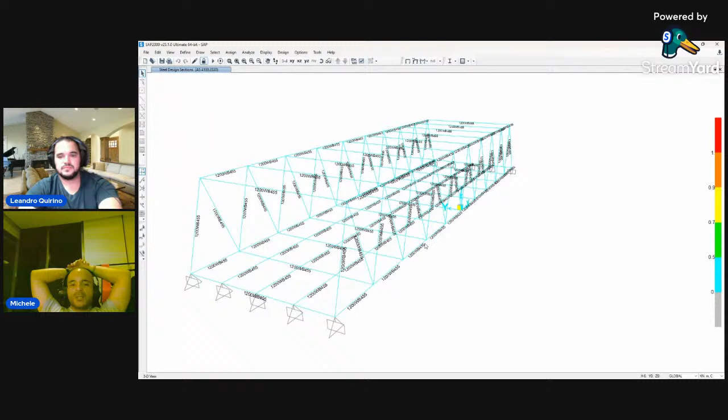Leandro, the point is, if a specific person in the world decided to do a job, and he has the money to do the job, and at the initial design you tell them this bridge costs $10, they will say, okay, we will go with $10. If during the design this bridge, instead of costing $10, costs $12, it's a huge problem. 20% more.

Yes, if you go to the client and say this bridge costs $15 at the beginning, but during the design you make the design of $14.5, everybody's happy. Did you get my point? Yes, I do. So that's the point. It's a very real balance. You are really running on a very narrow street, and there is a lot of balancing work to do. That's pretty much it. I understand.

What else would you take into account when you are doing this type of analysis? Conceptually, I pretty much told you everything that I will take into account. Now, the other thing that I would consider here, as I mentioned before, is how this thing is constructed. This one is mainly necessary when I start to design the connections.

But the stages, the mental steps are all the ones that I gave you. From a conceptual point of view, the design itself is complete. We have done a design from start to end with all the aspects covered. Now the next step, once we have designed the profile, once we agreed the criteria that we want to extend, the next step is to design the connections, to give them a methodology for building

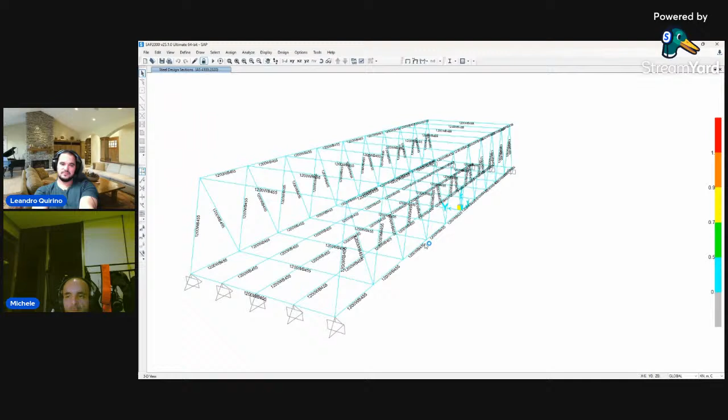No, but as a structural engineer, you can't send a design to the construction site that is not going to support the loads. I have to make sure that the loads are fully supported and the bridge doesn't collapse. But if the client tells me that he wants to save money, I will put in writing that he wants to save money, and the deflection criteria is up to him.